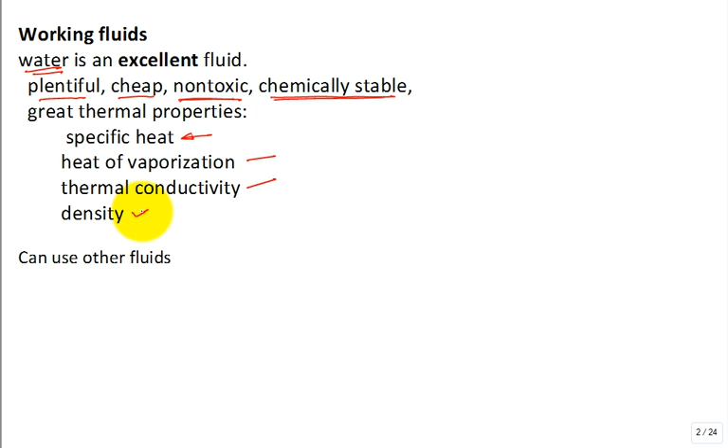Which brings us up to the organic Rankine cycle. So what's organic mean? Basically, they use a fluid which is an organic fluid, a high molecular mass fluid. And you want to pick it such that it has the right phase change, at what temperature it boils at or condenses at, pressure it boils at or condenses at. There's just a whole host of quote-unquote organic fluids that are used or being explored to be used in Rankine vapor power cycles. A lot of times they're motivated by a low temperature heat source. Maybe it's the sun and it doesn't have as high a temperature as in a solar collector as it could be for, let's say, burning coal.

It can get very hot. Or a geothermal well, which has warm, hot water, but it's not as hot as a coal-fired power plant could make the water. Or you're burning some industrial waste or agricultural waste, or even garbage from a community. Those used to be more popular. They're less popular because of emissions. Because people throw everything in the trash, and it may have a little lead, a little mercury, a little toxics here and there. And that eventually, if you're going to burn it, it's going to go somewhere. So they don't like the emissions from burning garbage. But there have been a number of plants built that burn garbage and then make electricity.

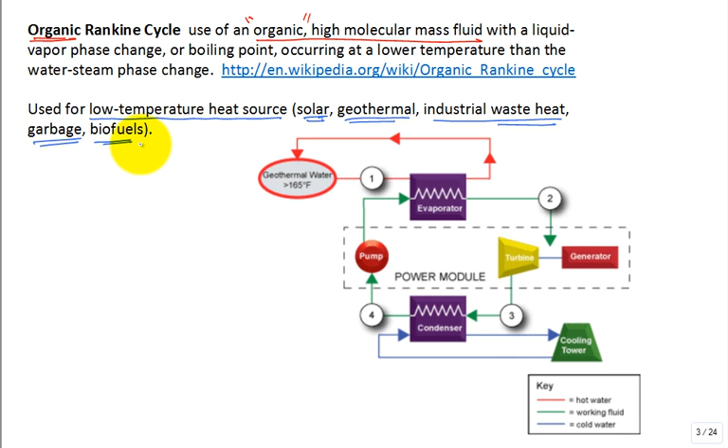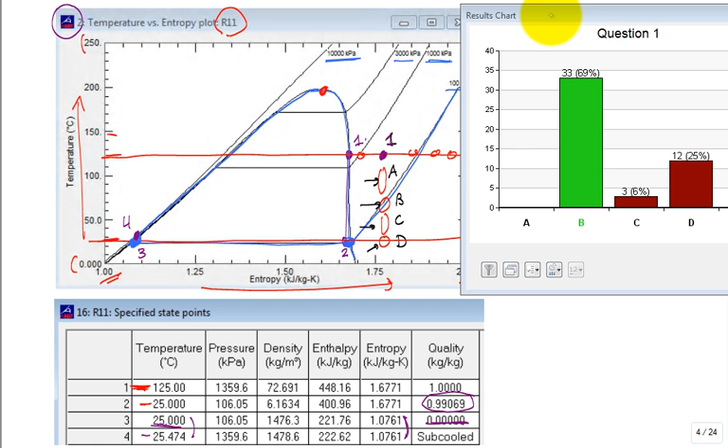Let me ask you this question. I'm going to tell you the right answer first. It was B. All right, now let me ask you this question.

At anywhere along this line, what is the pressure? About 100 kilopascal. Okay, a skosh below that line, another line right there—let's say that one is 90-ish. You see that? It would be a line of 90.

How about a line of 106? What does a line of constant pressure 106 kilopascal look like? Right like that, right? Okay. What happens to all these lines when they hit the dome? They go straight across, true?

Okay, what would happen if I came all the way down here? Can you tell me the pressure, roughly, of that line? I know—is the pressure, if it was actually down to this point right here where it was 25 degrees C and this value of S, right? What would the pressure be? Would the pressure be greater than 100 kilopascal or less than 100 kilopascal? Just verbally—it would be less.

Okay, now we're going to start to condense. What's going to happen to the pressure if I went that way? It'd have to go up. It's a constant pressure condenser. So anytime it would be 2 to 3, and 2 would be at the pressure where you're going to have the saturation corresponding to 25 degrees C saturation temperature. So P-sat in the condenser, where T in the condenser is 25 C, the majority of heat that you're ejecting, it'll be at 106 kPa.

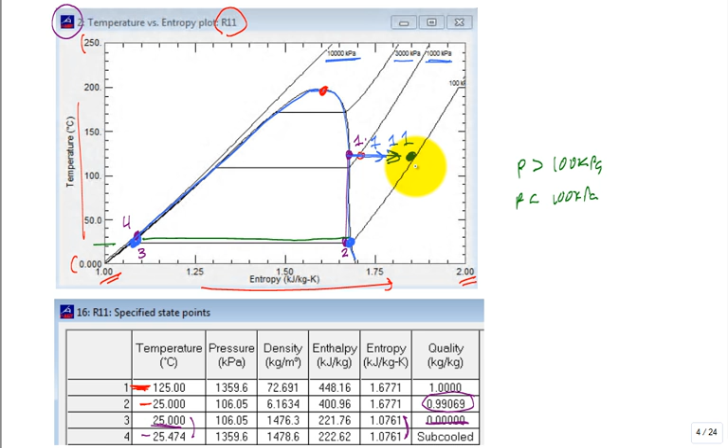Here's the same plot, the same data in a table, but I have asked this question, so we'll start the next question. It says, what is the turbine specific work, lowercase w sub t? Is it 42 kilojoules per kilogram, 47, 52, 57, or 62? One of those is close enough. So don't call it out. Let's do it with the clickers.

Tell me what is the turbine specific work. These data and the numbering is all the same for the temperature, the pressure, the density, the enthalpy, the entropy, and the quality.

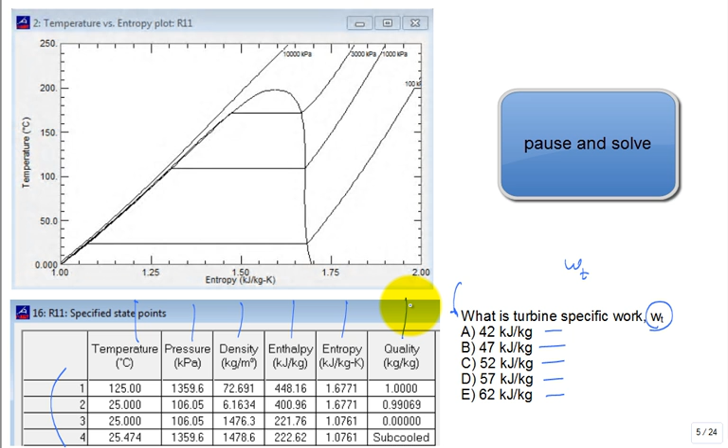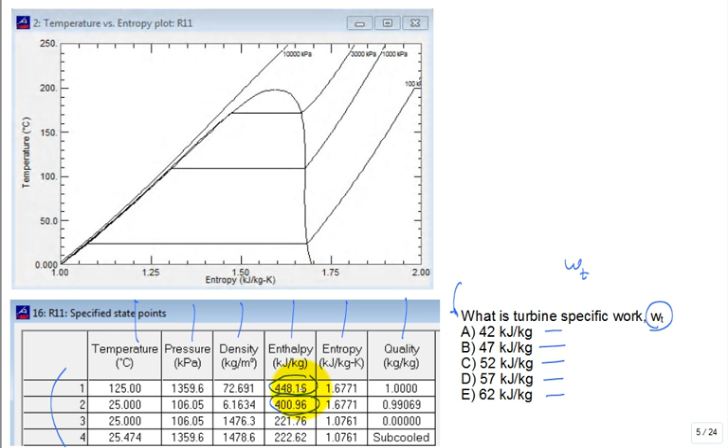Let's go ahead and stop, and we show the results. B it is. Wow, that's great. How did people get the answer B? H1 minus H2, right? And so you look at H1, it's around 448. This one's around 400. Hey, it's around 48. Oh, close enough to 47, right? Okay, very good. Would you like another one of those?

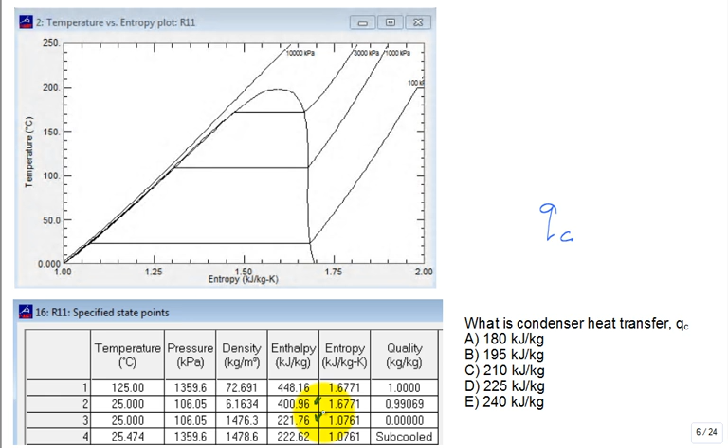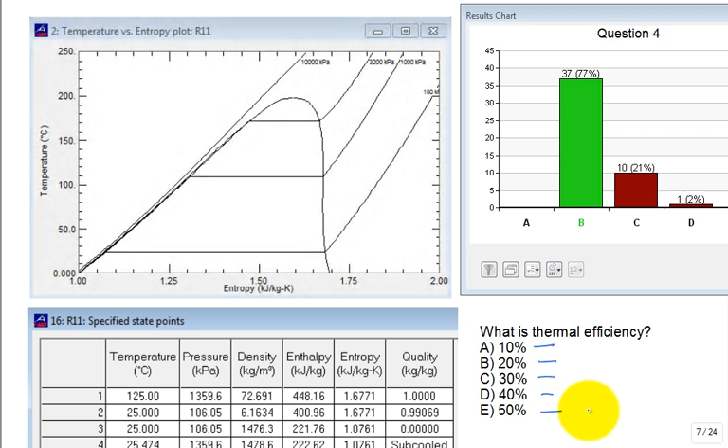So let's see where everybody was. Very good, 77%. Did that good? Here are the numbers for that problem. So it was 20% efficiency.

What's the backwork ratio? Do you want a high or a low backwork ratio? You want a low backwork ratio, but you want a high thermal efficiency.

Why did I calculate work net and Q net? Because what's good for the goose is good for the gander, whatever that phrase is. If I recommend that you do it, and I tell you I do it when I solve thermodynamic problems, guess what I do? I do the same. So I wanted to make sure I didn't have an error, so I calculated the work net and the Q net. And then here are all the works, the heat transfer, the work of the pump, the heat transfer in the boiler.

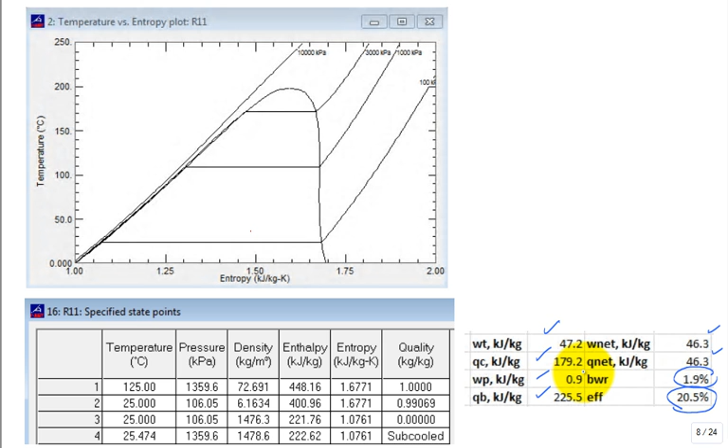That's not the only refrigerant you could use, that organic fluid. Organic Rankine cycle, you could also use isopentane. Okay, it's a new novel thing. It's like pentane, but it's a working fluid.

What do you notice about the TS diagram, the temperature entropy diagram, for isopentane? It's very skewed, shifts way over. It's not symmetric, is it?

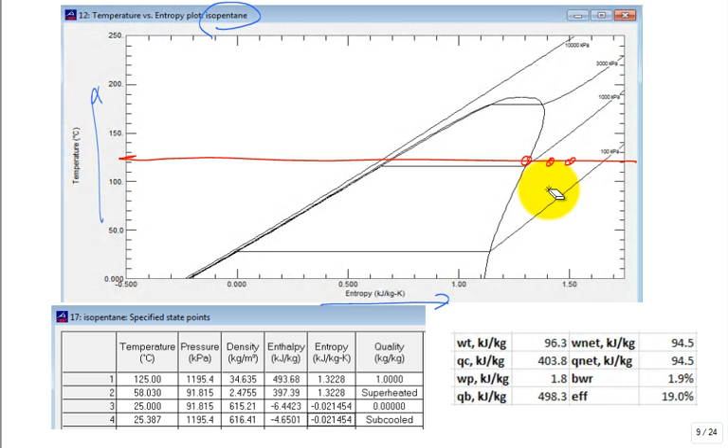So, okay, well, we have 125 degrees C fluid that I can heat up, coming out of my steam generator. Where do you think I probably want to stop taking it out at? Do you think it helps to superheat but only have it at 125? No, that's not going to help, is it? So we stopped, that was one of the points of that last discussion. There's no sense, because your boiler pressure goes down. So bring it out saturated vapor at 125 degrees C.

Now I'm going to expand it, but I'm going to do most of my heat rejection at 25 degrees C. The boiler, or the condenser, is going to be able to reject heat to something that's 25 degrees C. So I take a look at it. It's going to be like 92 kilopascal, the condenser pressure. See how I got that 92 kilopascal for 25 degrees C, and it's here.

So when I expand, can I get this all the way down to 25 degrees C and 92 kilopascal? No, I can't do that. I mean, first of all, the 92 kilopascal kicks up like this. So guess where we end at state 2? I have to go to the condenser pressure, and it has to be isentropic expansion. So there's state 2, and so it's at 92 kilopascal. It's slightly superheated, see that? Superheated at state 2, okay.

Now, once I do that, the cooling right here is just cooling without condensing, at constant pressure in the condenser. And then I finally start to get phase change as I condense it in the condenser. Where is state 3? Where is state 4? Right? So there you go, look at the numbers here.

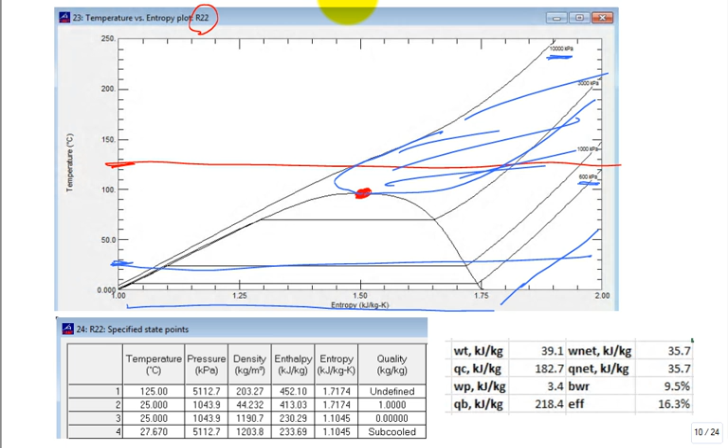So this point right here, I forgot the name of it. What is that point on the dome called? Supercritical fluid. That would be kind of up in this region. All up in here, supercritical fluid. Is there a nice, clean demarcation between that supercritical region and superheated region? No, but it's somewhere like that. You have higher pressure, high temperature. Up in this region is supercritical fluid. So basically, you're going to be bringing out a supercritical fluid.

Okay, where do you want to stop? Let me ask this clicker question. Stop here, stop here, stop here, stop here, or stop. Oh, that's too many, forget it. We're just those 4 choices. Where would you stop?

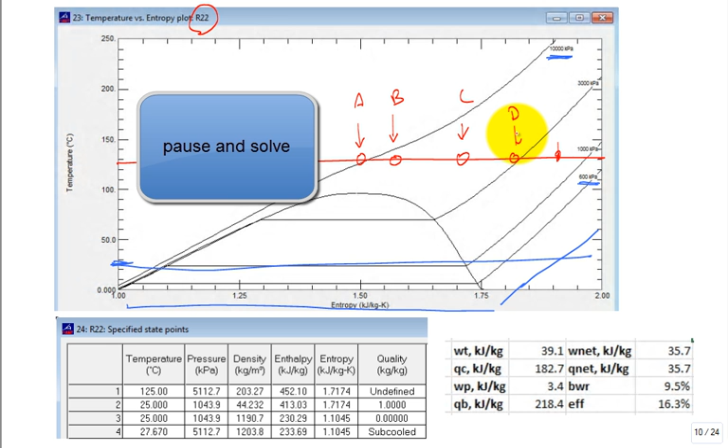So a lot of people say stop at C. Well, I just realized after I asked the clicker question, can you tell where I stopped? Because what I want to do is have isentropic expansion, constant S expansion. And if I really want to get a lot of change in enthalpy and I want a practical turbine, I don't want 50% quality. Not good. And out here, I would have to be stopping up at a higher temperature for the exit. Not good. So C is the best answer, isn't it?

And if you look at it, we have this 1.717 for the entropy for both state 1 and state 2. Notice that the temperature at state 2 is 25 C, so we're bringing it right in that vicinity. But look at that pressure: 1,044 kilopascal for the condenser pressure. The boiler pressure was 5,000 kilopascal, and then you have a 1,000 kilopascal condenser pressure.

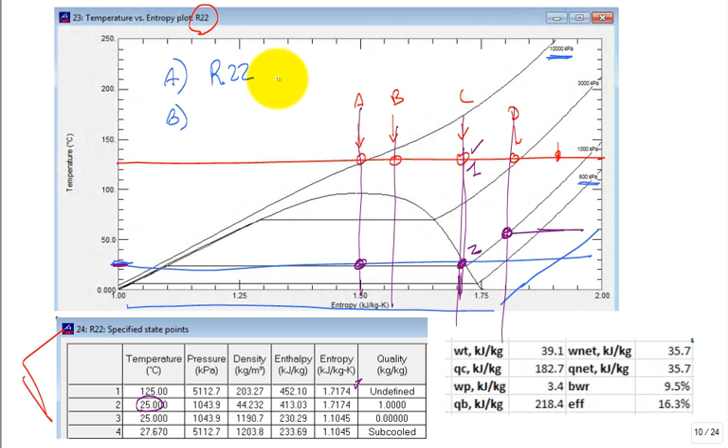I like to ask questions like this. Somehow there's a pinhole leak, somebody took an ice pick, went to the condenser, and popped a hole in it. Clicker question here: you have choice A or choice B. If somebody punches a hole with the ice pick in the condenser, will refrigerant 22 rush out, or will the outside air rush in?

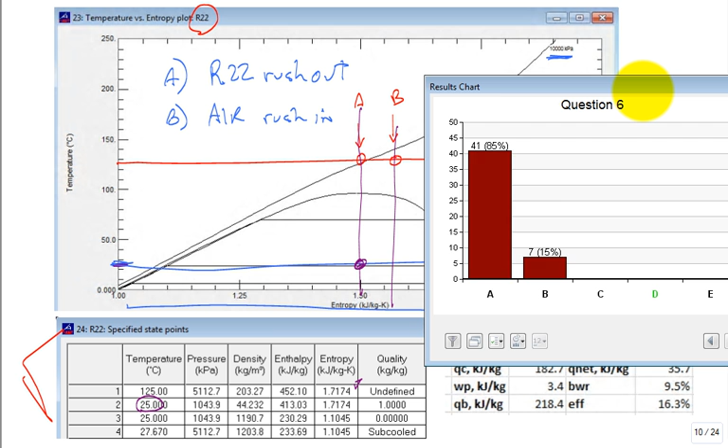All right, so everybody's in. Let's go ahead and stop. I want 100%. Okay, well, we blame it on thick thumbs. You intended A, I know you intended A.

But take a look at this pressure right here. Isn't that the condenser pressure? What is atmospheric pressure? About 100 kilopascal. Which is higher, 1,000 or 100? It's always going to flow from high pressure to low. All right, let me do this.

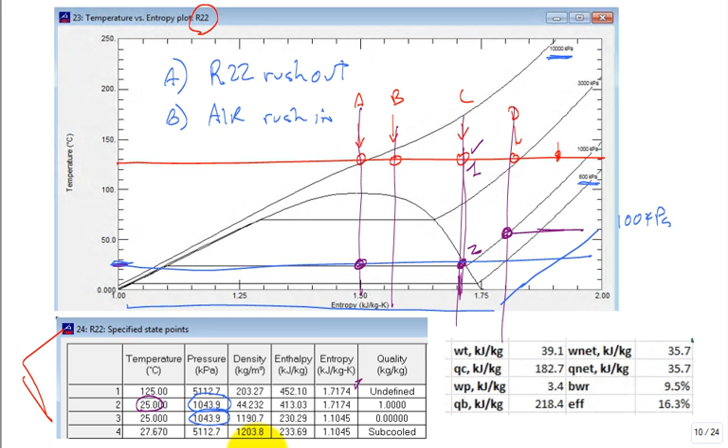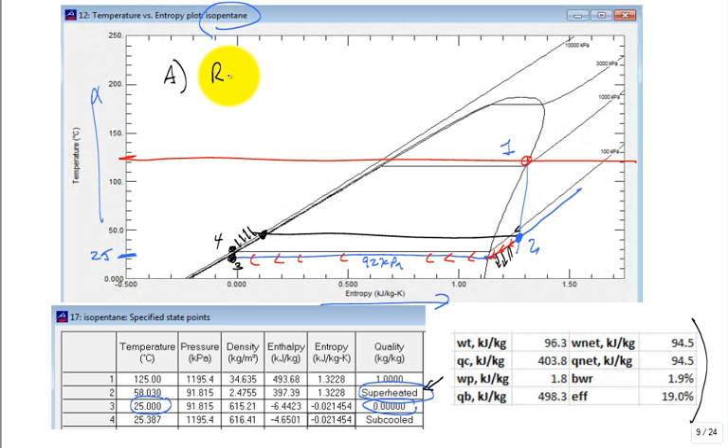I have this problem and I have a condenser. I take a pick and I poke a hole in the condenser. Will the isopentane, the refrigerant, rush out, or will the air rush in? I will start. I have a condenser, it's a cycle running with isopentane. I take a pick, I poke a hole in that condenser.

So let's go ahead, are we going for 100%? Yes, I think we're going to get 100%. Here goes. Stop. Show.

98. That is definitely a slip of the thumb.

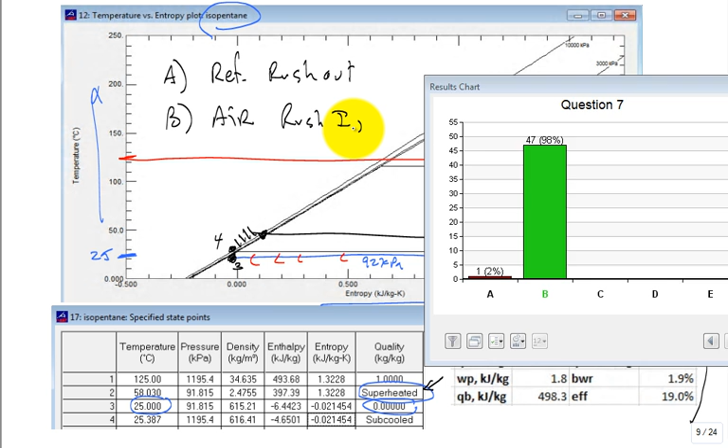So I asked this question: what is the pressure in the condenser? Around 92. Is 92 greater than 100 or less than 100? Which way is it going to rush, from 100 toward 92? It's a slight vacuum in that condenser.

Professor, is there a vacuum pump to create the vacuum? Nope. You may have needed a vacuum pump to purge the air to charge it with the refrigerant isopentane.

It's a refrigerant, isopentane, I've got the number, it's 601A or something. It has a refrigerant number just like R11 and R12. But anyway, you got to get the air out, fill only with isopentane, and then run the system.

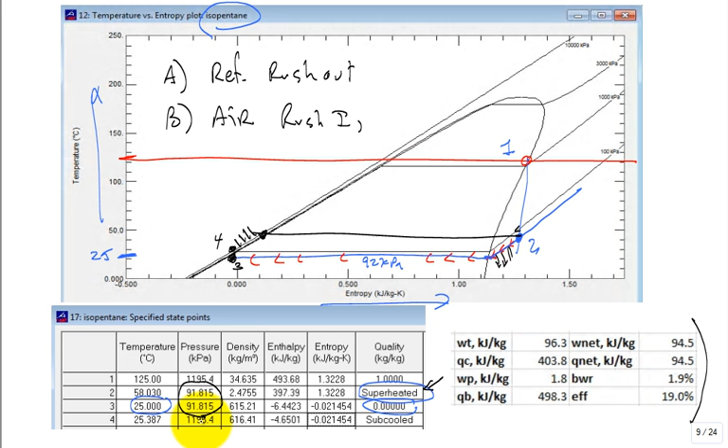Okay, thank you for participating. This is a summary of all three. Here is that refrigerant 22, the isopentane, refrigerant 601A.

Now the question for you is, which fluid would you pick? Which fluid would you use if you had to design an organic Rankine cycle? And those were the three choices.

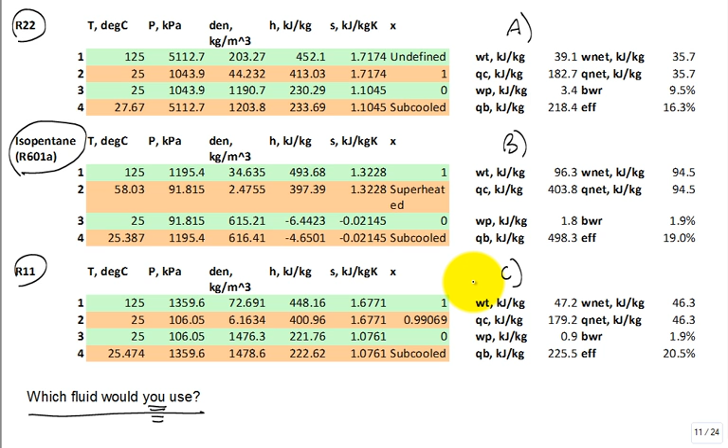I will now turn it on. We'll take your pick. It's answer A, answer B, or answer C. You would use R22, isopentane, or R11.

So let's show the results. All right, so the results, a lot of people like C. Why do a lot of people like C? Well, it's got a slightly higher efficiency, but I said you could boost efficiency if you just regenerated.

Okay, I'm leaving it on so you can change your answer. We're going to change, everybody's going to change the answer to D, and then I'm going to count everybody right, okay? But go ahead, change your answer to D. We're going to see if that works.

Okay, but listen to me while you're changing your answer. What are some positives? What are some positives about this? What do you not like about A?

The backwork ratio is 10%. I don't like that. I don't like also lower thermal efficiency, but you know what, that backwork ratio really bothers me.

Okay, these two backwork ratios are comparable, but there's one other number. It's right in here. Which one do you like? Higher power generated. Which fluid do you like from a work net point of view?

For every kilogram that goes in the loop, you're able to pull out 94.5 kilojoules of work. For every kilogram per second flow rate going in the loop, you get 94.5 kilowatts power out.

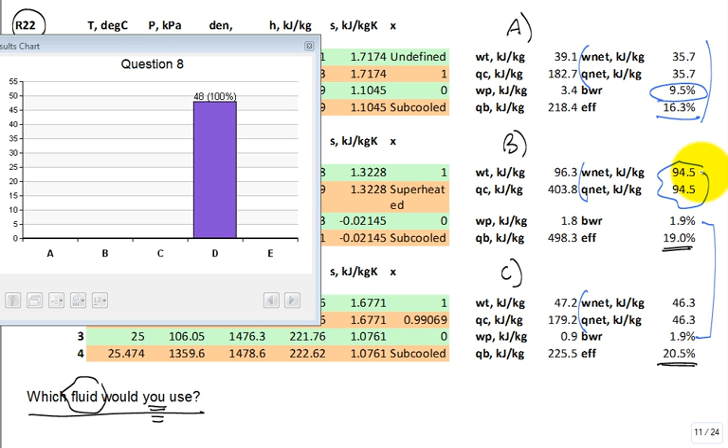Now, somebody else is saying to their mind, okay, everybody's getting the D. Thank you very much. Now we'll stop. Stop that. Congratulations, we have 100% correct.

Now, somebody else says something about, I don't know these refrigerants, but I'm a little worried that they may leak. Good call. It's just like we talked about water.

There's some word called toxic. If it leaks out and you inhale a little bit, you worked with refrigerants. You ever inhale a little whiff of refrigerant? Freon gas from R12, yeah, it's funky, man. Yep, so not healthy, but it's what happens.

You ever spill it on your skin? You ever had any spray in an eye? You ever seen anybody with refrigerant sprayed in the eye? I have, when I was a young man. The oil, the other stuff.

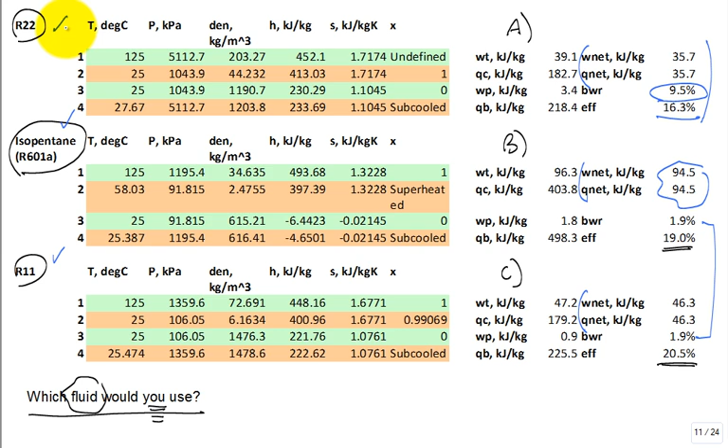So anyway, I try to make it practical that you need to, as an engineer, I've got 5 seconds here, material safety data sheet, and then you find all the characteristics. Like this was for the isopentane, and they tell you a little bit more about it, but it's extremely flammable liquid.

It's heavy vapor. What do you mean by heavy vapor? If you have a spill in this room, where's it going to go? To the floor. And if I bend down to pick something up off the floor and I take a whiff, right? All right, they can have ignition problems and flashback, and then central nervous depressant and anesthetic.

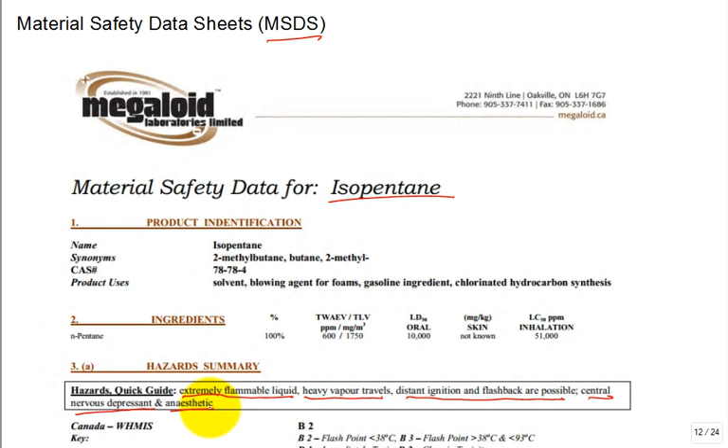So all these things you have to be very careful with, because stuff does leak. You say, please never spill it. Yeah, well, it's going to get spilled.